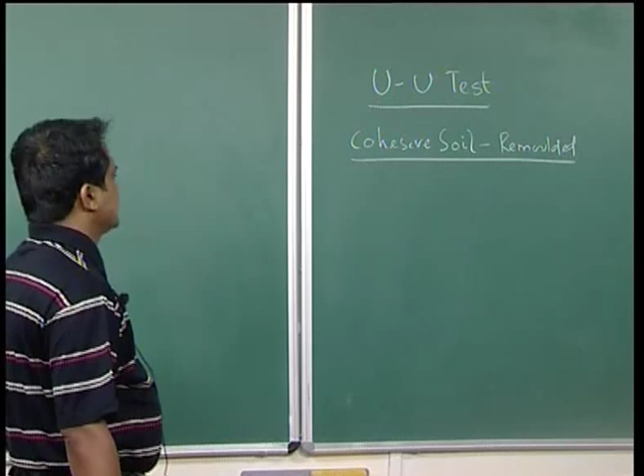Now, we will start this triaxial test on cohesive soils: UU, CU and CD test. We will explain it step by step, starting with the UU test for cohesive soil, remolded or compacted.

Now, take a soil sample.

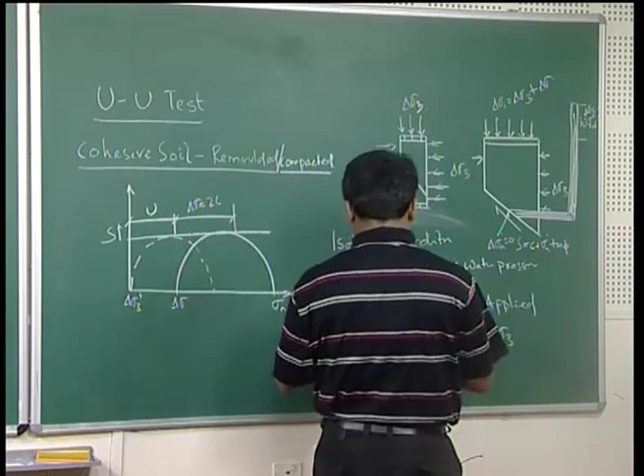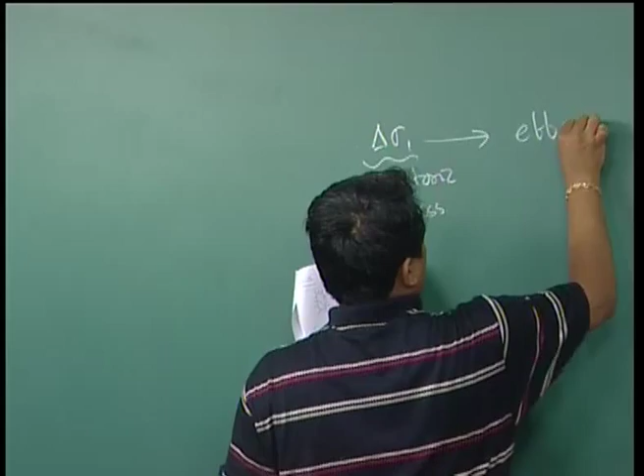That means with no drainage, U is equal to delta sigma 3 confining pressure. That means delta sigma 1 is your deviatoric stress, which will be effective stress on plane AA, and delta sigma n prime is equal to delta sigma n minus u, which is equal to 0.

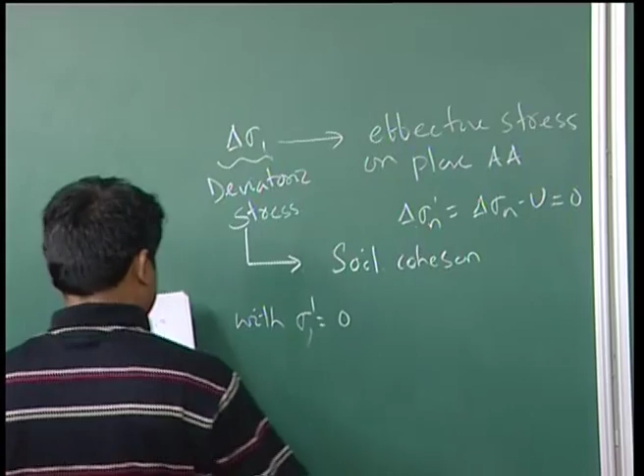This will be carried by soil cohesion. So, with sigma prime effective stress equal to 0, that means friction in terms of total stress is 0. That means S is equal to C.

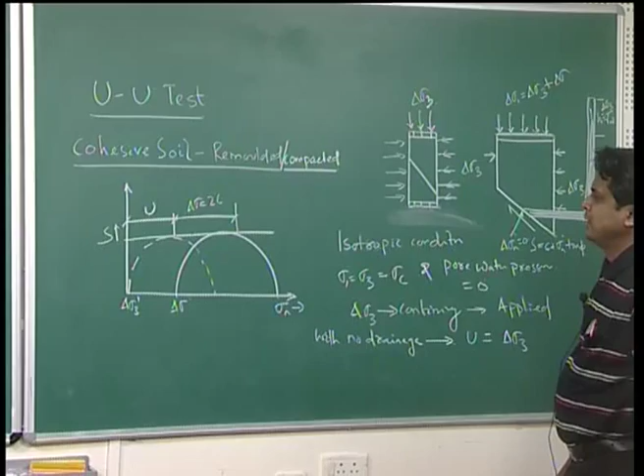Now, if you look at this, this is my UU test; earlier we finished for cohesionless soil. In triaxial test, UU test is unconsolidated, undrained, meaning drainage path is closed. If you look here, this is my typical soil sample. Initially, confining pressure has been applied, all round confining pressure, let us say delta sigma 3.

In isotropic condition, what is isotropic conditions? That means sigma 1 is equal to sigma 3, which is equal to sigma c. In isotropic conditions, pore water pressure is equal to 0. So, delta sigma 3 is your confining pressure, it is applied.

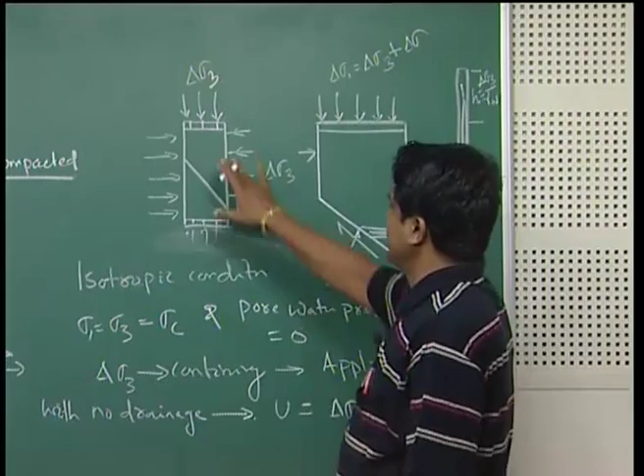How is the shear strength, meaning the triaxial test, conducted? Initially, the soil sample is put in the triaxial mold. Inside that triaxial cell, the pressure delta sigma 3, all round confining pressure, is applied. Once the all round confining pressure has been applied, with this pressure consolidation may be done with isotropic conditions, or without isotropic conditions.

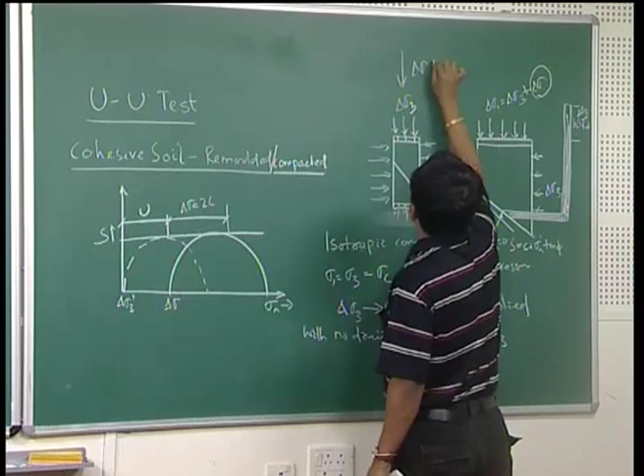So, I have taken the failure envelope of the soil sample in these directions. Once after the consolidation, meaning there is no further consolidation, you apply for shearing, meaning delta sigma 1 is your deviatoric stress, that is delta sigma 3 plus delta sigma. This is my stress applied in vertical. If this is my total sigma 3 or delta sigma 3, this plus delta sigma will be my delta sigma 1.

Now, what will happen? Delta sigma 3 is your confining pressure applied; as it is unconsolidated, undrained, there is no drainage. What will happen? U is equal to delta sigma 3, whatever the pore water pressure, it will be because of your applied confining pressure. The moment you apply your deviatoric stress delta sigma 1, that is your effective stress on plane AA.

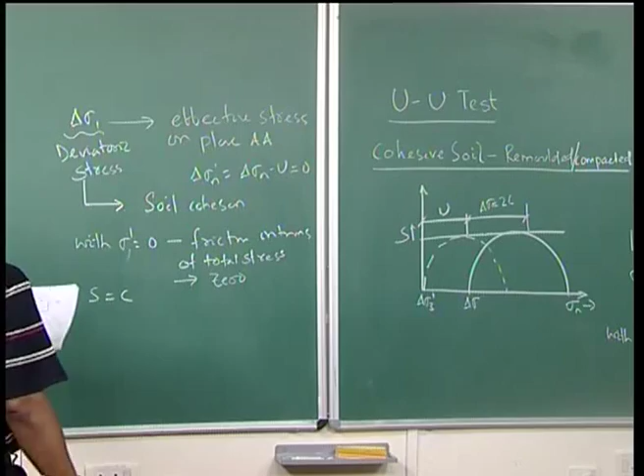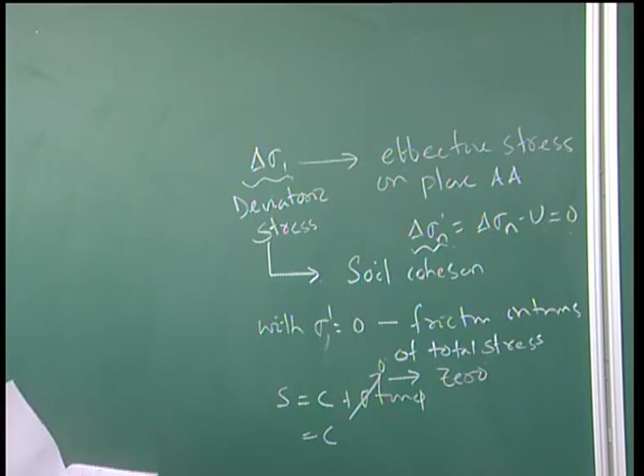Delta sigma prime, effective stress, is equal to delta sigma n minus u, which is equal to 0. So what happens with this term? Friction in terms of total stress is equal to 0. That means S is equal to C plus sigma tan phi. So this term will be 0, then S is equal to C, meaning your shear strength will come in terms of C. Now, the diameter of the Mohr circle is unchanged by pore pressure, but the origin of the circle is shifted to the left by pore pressure U.

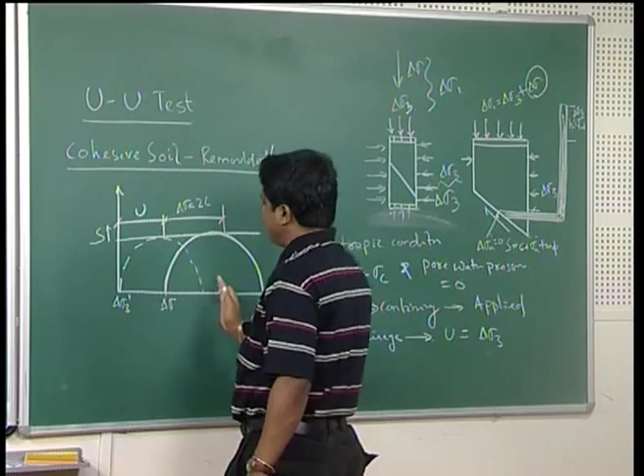If you look at here, it is unchanged, but this origin has been shifted from here to here in terms of U, the pore water pressure.

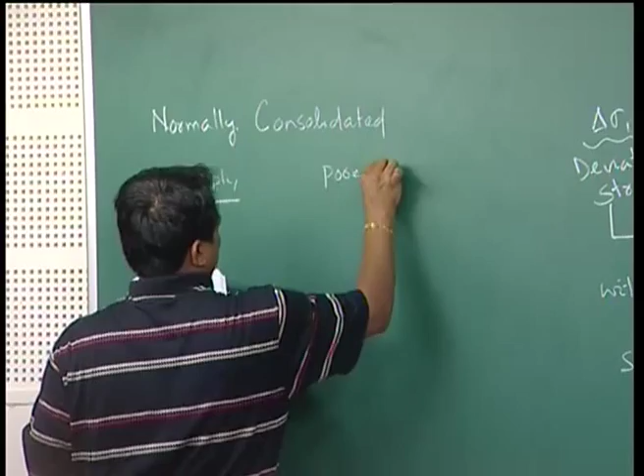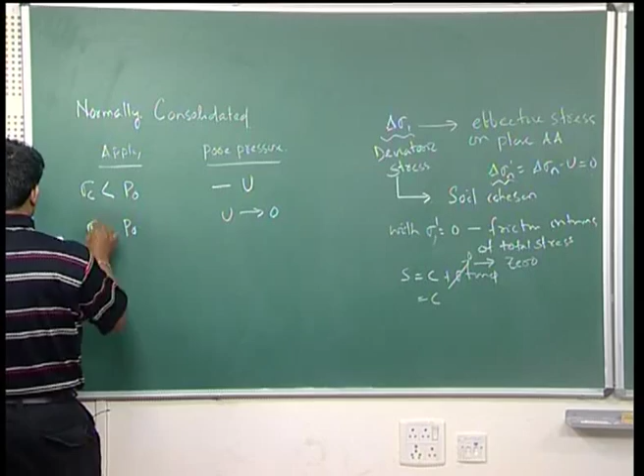Now, for normally consolidated soil, what will happen if sigma c is less than P0? That means it will be negative pore water pressure. If sigma c is equal to P0, U tends to 0. If sigma c, the consolidation pressure, is greater than overburden pressure P0, then positive pore water pressure is developed. Negative pore water pressure will develop when sigma c is less than P0.

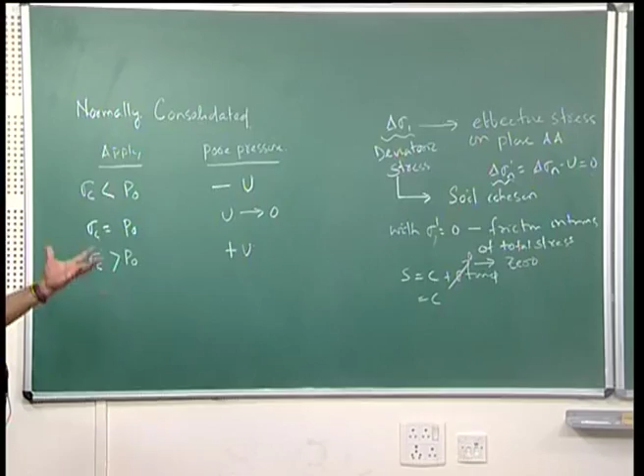That means when the consolidation pressure is less than P0, it will try to take the water inside, so negative pore water pressure will be generated. When sigma c is greater than P0, positive pore water pressure builds up inside the soil, so positive pore water pressure will be developed. When sigma c is equal to P0, pore water pressure tends to 0.

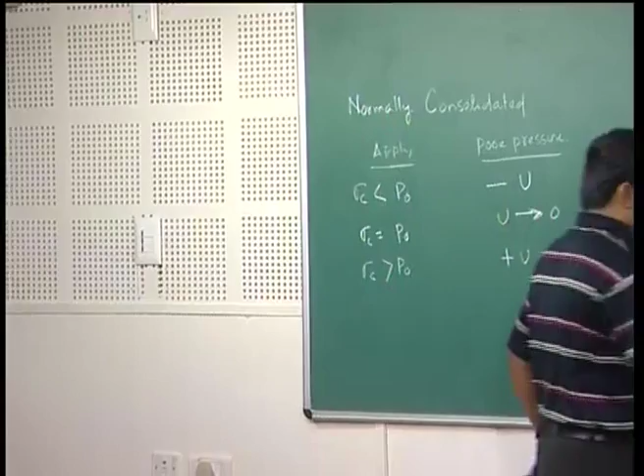Now, next part is your consolidated undrained test, CU, that is your CU test.

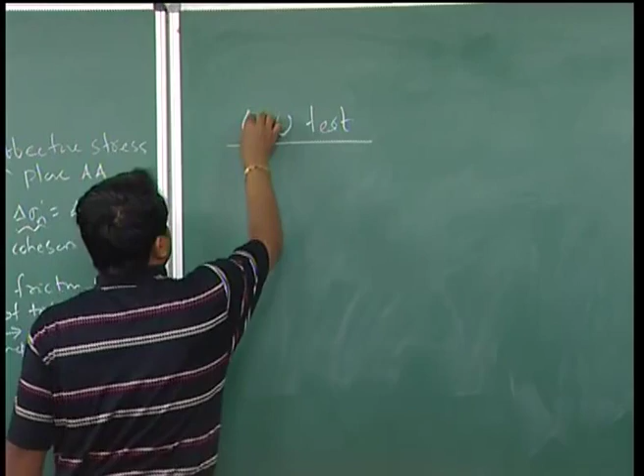CU test means consolidated undrained test. That means consolidation will be there, and during shearing, this drainage valve will be closed. So after consolidation, shearing will be done in undrained conditions. Now, if I draw the diagram in two conditions, one is isotropic conditions, other is anisotropic condition.

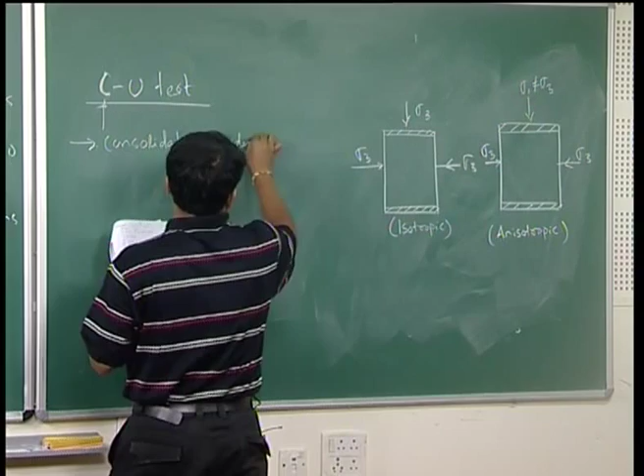In isotropic conditions, that means consolidation under cell pressure sigma c, under cell pressure sigma c, it is not stress as in situ.

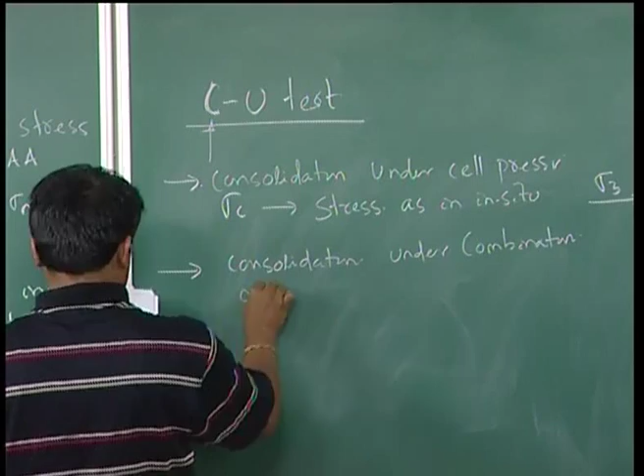Now second is your consolidation under combination of cell pressure, that means sigma c, that is your cell pressure plus additional vertical pressure. Additional vertical pressure: sigma 1 is equal to sigma c plus delta sigma 1. This is your additional vertical pressure.

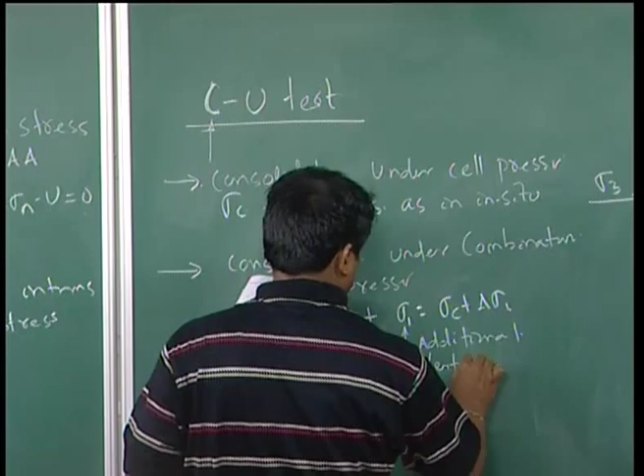This is your anisotropic condition, and this is truly in situ condition.

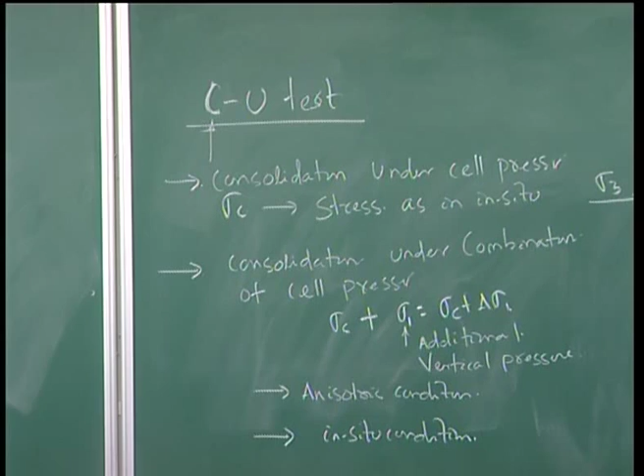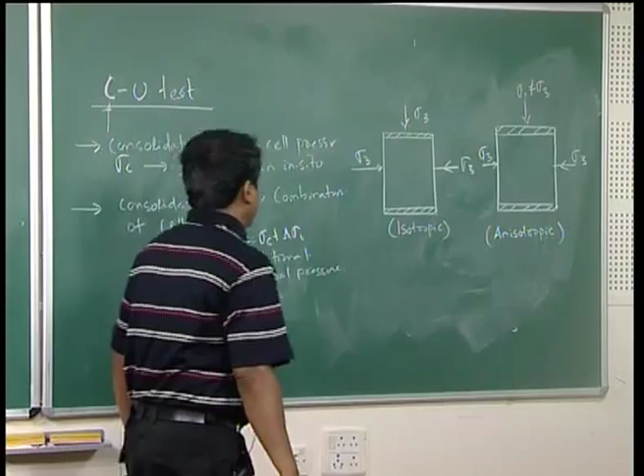Look at these two conditions. CU test is your consolidated undrained, that means the soil sample has first been allowed to consolidate, then after consolidation is over, shearing will be done in undrained conditions. I have made two conditions, one is isotropic, another is anisotropic.

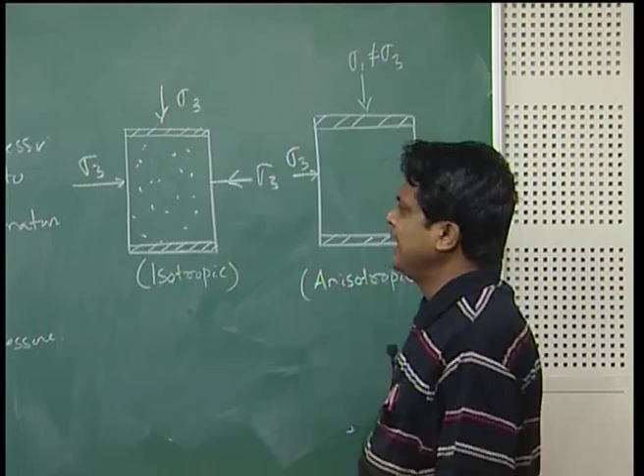In general, what happens in the laboratory: the consolidation is done by means of all round confining pressure or cell pressure sigma 3. Initially the soil sample is there, you go for saturation, once saturation has been achieved with your B parameter checked, then you go for consolidation. The consolidation is done with only the cell pressure applied. Once you open your drainage valve, or by measuring the change in water level, that is also a standard way you can find out consolidation under the cell pressure.

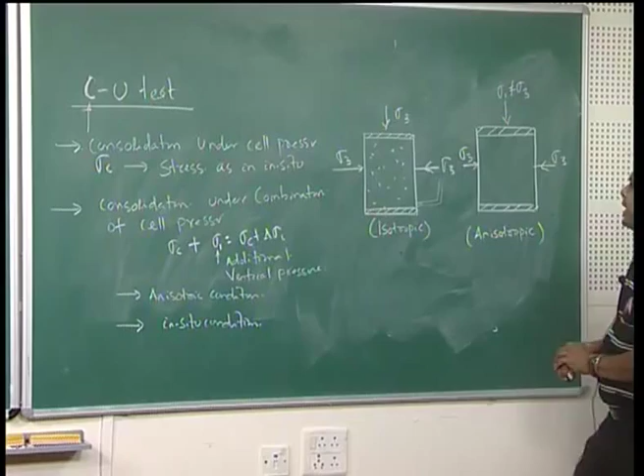In this condition, particularly consolidation under cell pressure, because the cell pressure acts around sigma 1 and sigma 3 - since this is cylindrical shape, sigma 1 and sigma 3 are the same - that condition is called isotropic.

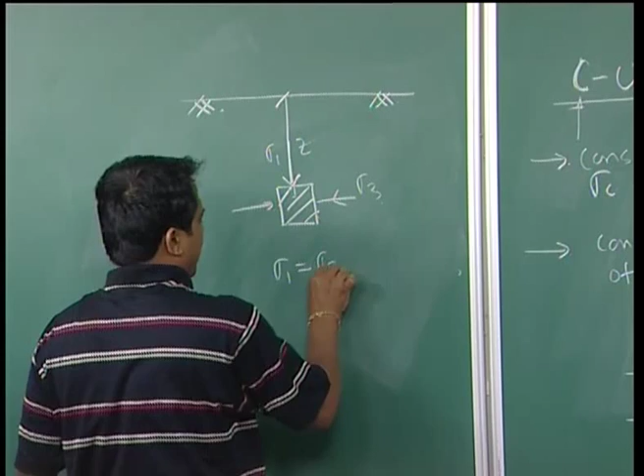But what will happen, it is not truly reflecting the soil sample. Suppose this is my field condition: suppose the soil sample is collected at a distance or at a height z from the ground surface. Once the soil sample is there, it has both vertical as well as lateral pressure, this is your sigma 1, sigma 3. It is not always that sigma 1 will be equal to sigma 3, or which is also equal to sigma 2. If stresses are same in all round directions, that condition is called isotropic, but this is not true in field conditions.

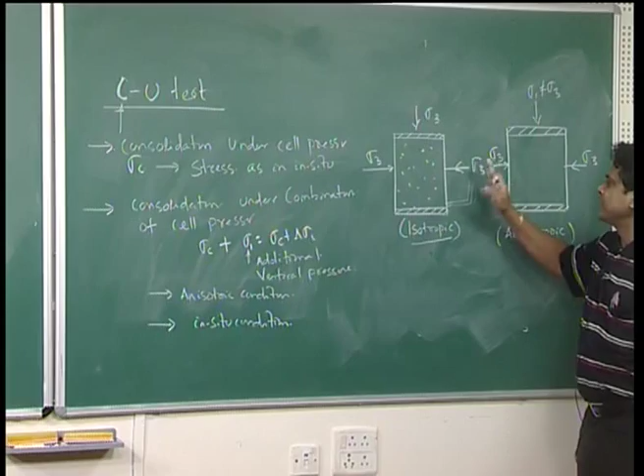That means to simulate the field conditions in the laboratory, consolidation under combination of cell pressure is used. First you apply your confining pressure or cell pressure, let us say sigma 3 is equal to 1 kg per centimeter square. Apply the confining pressure all round. I will show you a video after this test, about this equipment - I will show some photographs or video.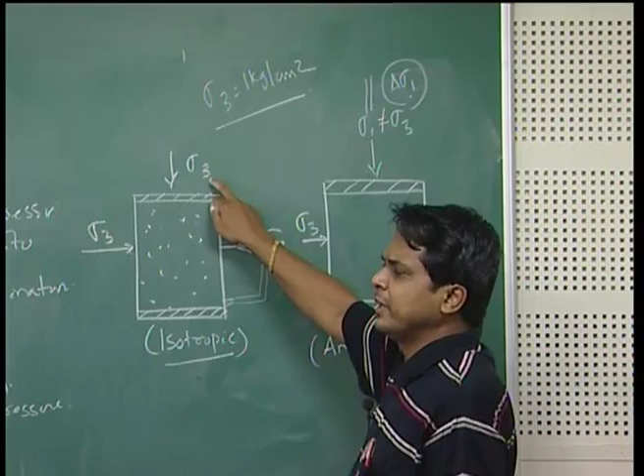So confining pressure sigma 3 of 1 kg per cm square has been applied. Then once that has been applied, you apply additional vertical pressure, that is your sigma 1, which is equal to delta sigma 1, additional vertical pressure you apply. So the all-round confining pressure is sigma 3, but now sigma 1 is no longer equal to sigma 3 as in the isotropic case.

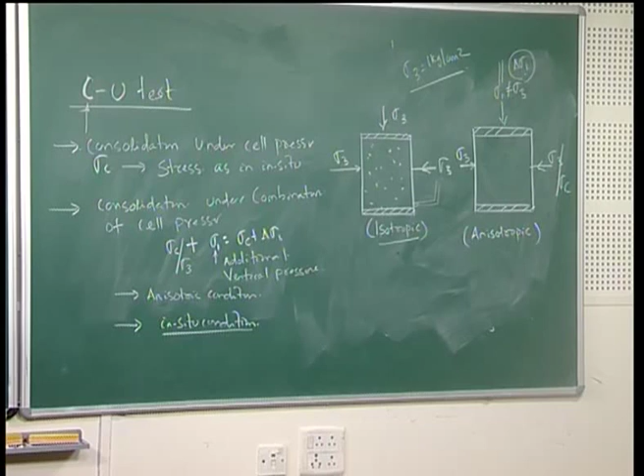In that case, because of the additional vertical pressure applied, sigma 1 is equal to sigma 3 or sigma c plus delta sigma 1, that additional vertical stress applied. So sigma c, or sigma 3 plus delta sigma 1, represents your anisotropic conditions, and that will truly represent your in situ conditions.

In general, in consolidated undrained test, there are two types: isotropic conditions and anisotropic conditions. Generally in the laboratory, isotropic conditions are applied for consolidation. In that case, all round confining pressure sigma 3 is maintained constant, and with this all round confining pressure, consolidation is achieved.

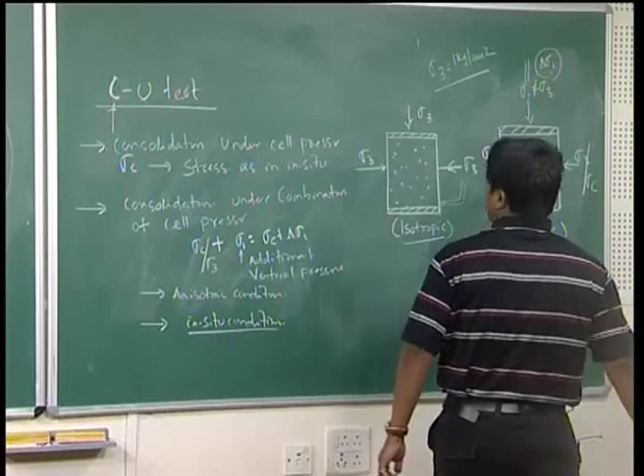But in anisotropic cases, an additional pressure after the all round confining pressure sigma 3 is applied, that is sigma c plus delta sigma 1. So sigma 1 will become sigma 3 plus delta sigma 1. This will be your anisotropic condition, meaning stresses in the x and y directions are different.

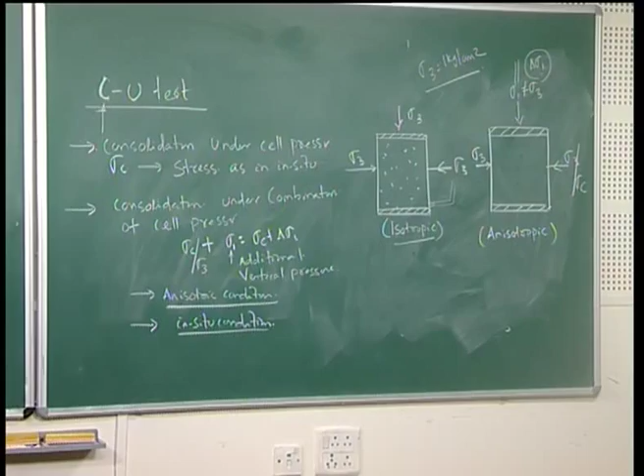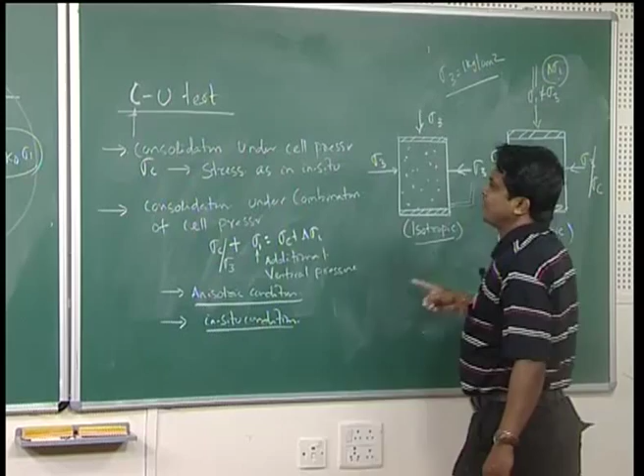This truly represents in situ conditions. If I take a soil sample below the ground surface, sigma 1 is not necessarily equal to sigma 3, because sigma 3 is always equal to k0 times sigma 1. So sigma 1 will definitely be different than sigma 3. To achieve these conditions, anisotropic consolidation should be applied in the laboratory before starting the undrained shearing.

Now let us draw the basic diagram of void ratio versus log P.

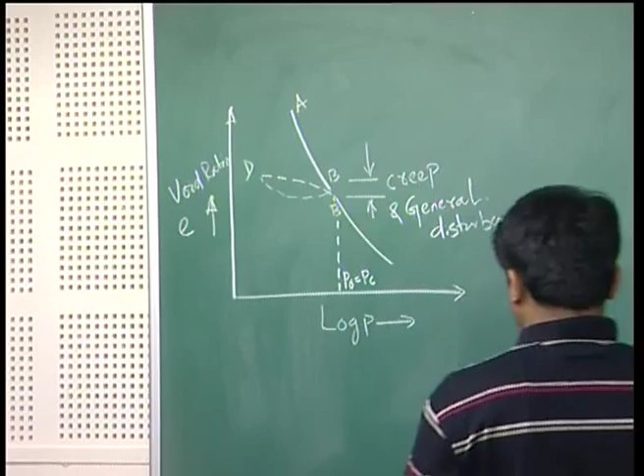There are two graphs I am drawing: one is E versus log P, the other is delta sigma 1 versus strain, you can say stress versus strain.

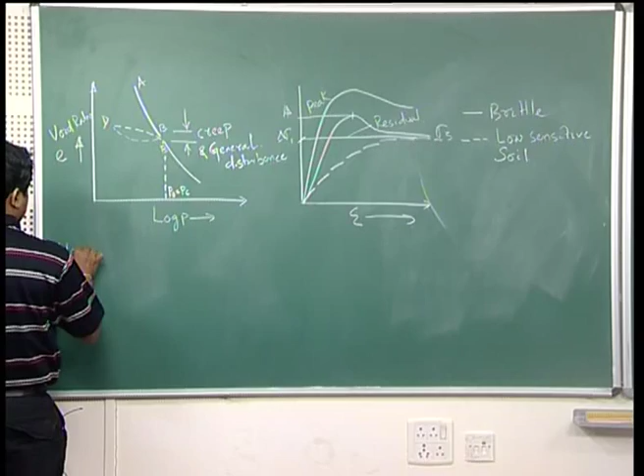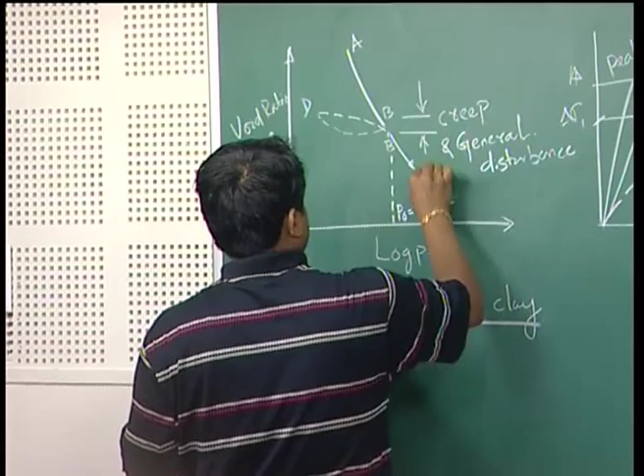Under normal field conditions, soil consolidates along path A, B, C. So the present status of the sample, if I take a soil sample in the field, as it is normally consolidated clay, means this consolidation process is still underway.

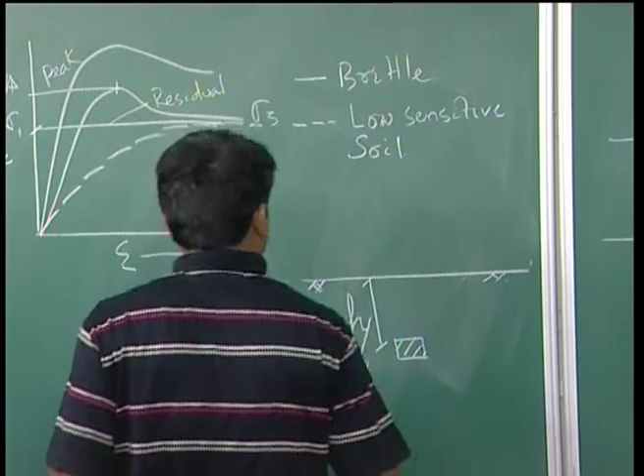At a depth h or z, once I take the soil sample, point B represents the present status of the sample. At a distance h, the soil sample is there, so the status of the soil sample represents point B.

Corresponding to one overburden pressure P0, from this B status, when the sample is removed from the ground surface, as it is a normally consolidated soil, the present state of the sample is at point B.

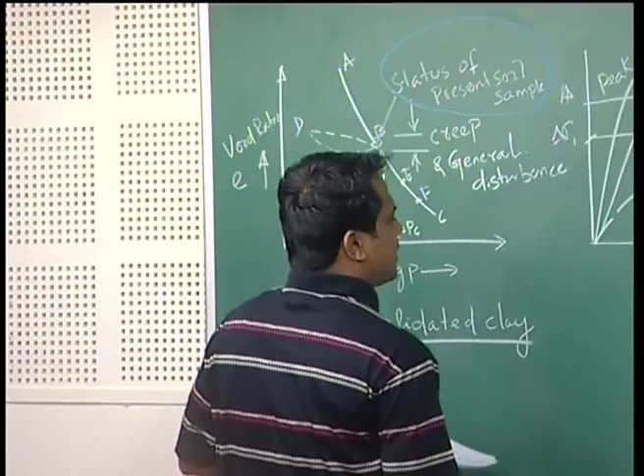The moment the sample is taken out from the field, it loses its overburden pressure. Without overburden pressure, the sample will try to expand, and this expansion is represented by line BD. Pressure is lost and hydrostatic pressure conditions are changed, so line BD represents sample expansion due to loss of confining.

This is sample expansion due to loss of overburden.

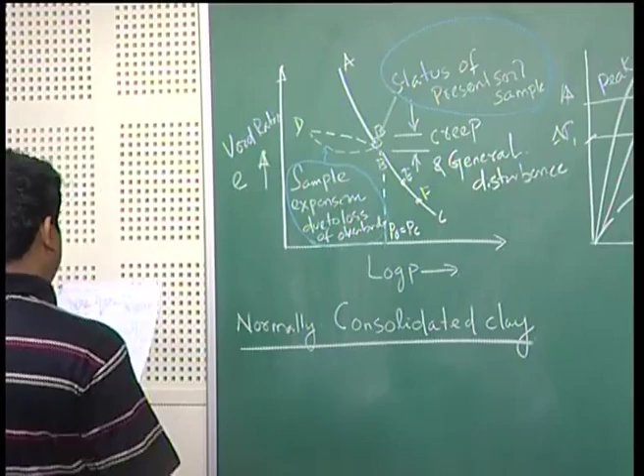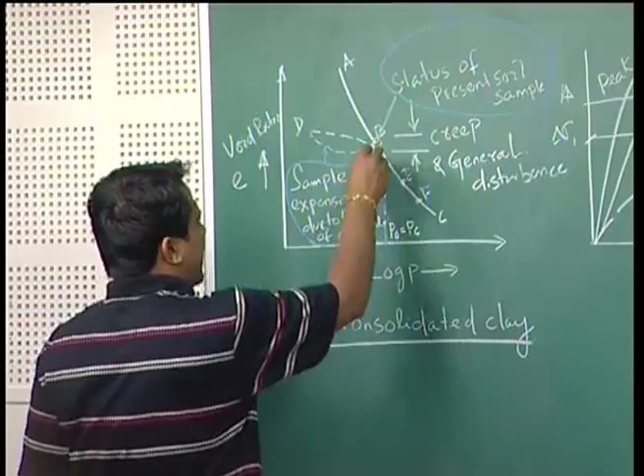Then from D to B prime, what happens after the sample is placed in the triaxial apparatus? At this point, this was the field condition. BD represents the sample taken from the field, with expansion occurring due to loss of overburden. B represents the status of the soil sample in the field.

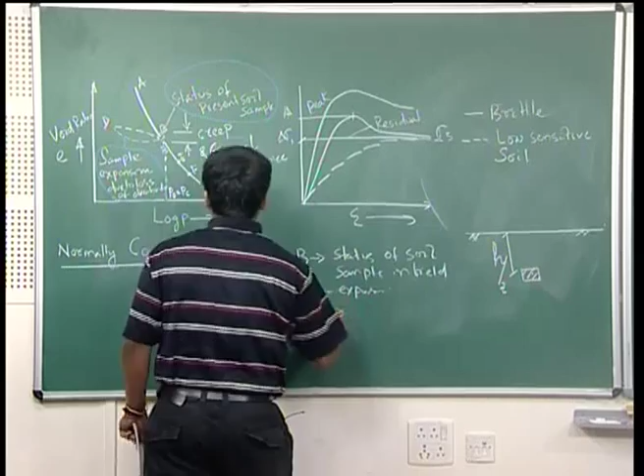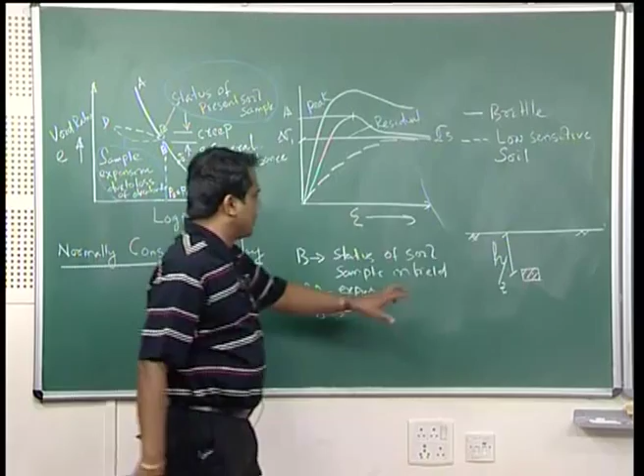BD is the expansion due to loss of overburden, then D to B prime occurs the moment you put it inside the triaxial cell, because of confining pressure recompression will start, this is D to B prime. So in bringing this sample from the field to the laboratory triaxial test, it will go from B to B prime to regain its original position.

If I have taken B to B prime here, what will happen? B prime is nothing but your degree of disturbance.

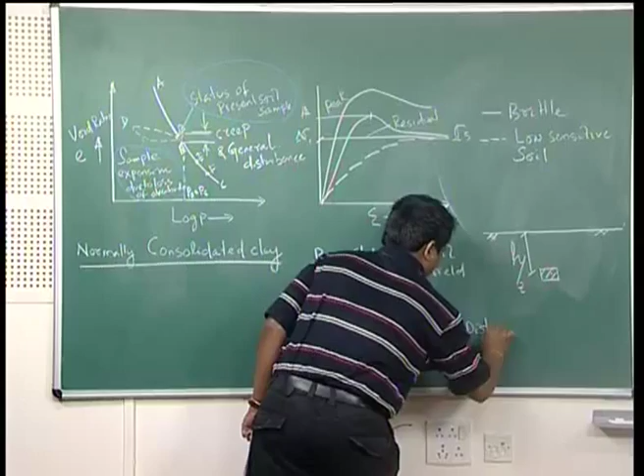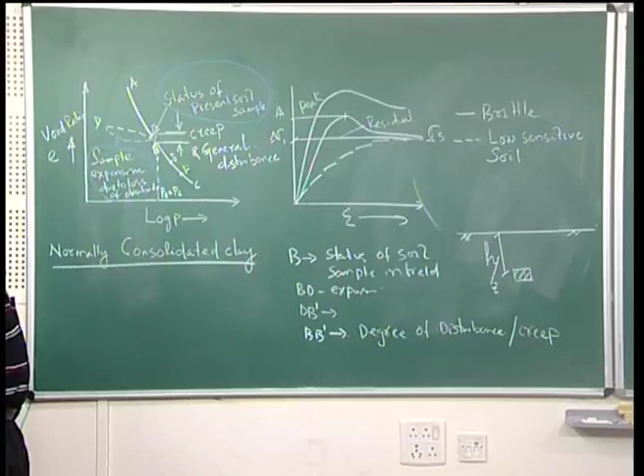Degree of disturbance, or it may be because of your creep. Now, look at this once again, this explanation is there. ABC is your normal consolidation graph for normally consolidated soil. Normally consolidated clay means the consolidation is going on. Let us say B is your point which represents the status of the present soil sample.

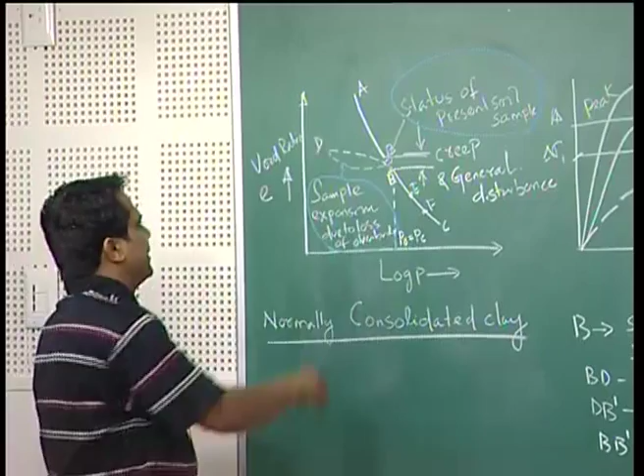Then, the moment you take the soil sample from the field to the laboratory, it will lose the overburden. Then the sample tries to expand because of the loss of overburden, that is B to D. Then the moment you put the soil sample inside the triaxial, because of confining pressure sigma c, it will recompress from D to B prime.

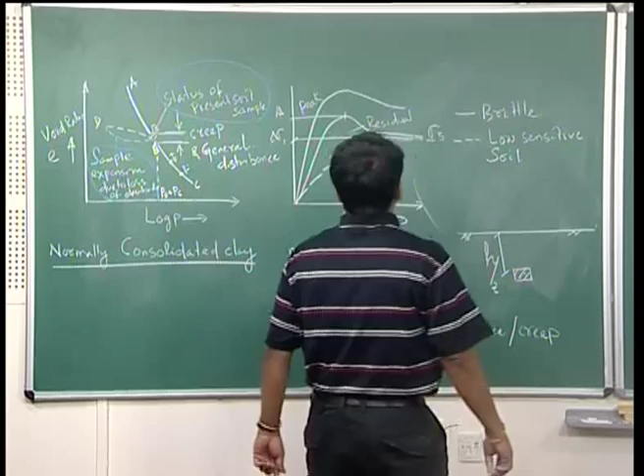This particular B to B prime is your general disturbance of the sample from field to laboratory, and it represents your creep. Now, these are stress versus strain curves. One I have drawn for brittle, the other for low sensitive soil. After the peak, the residual part will merge with your low sensitive soils, or you will get a residual, meaning strength remains after your peak.

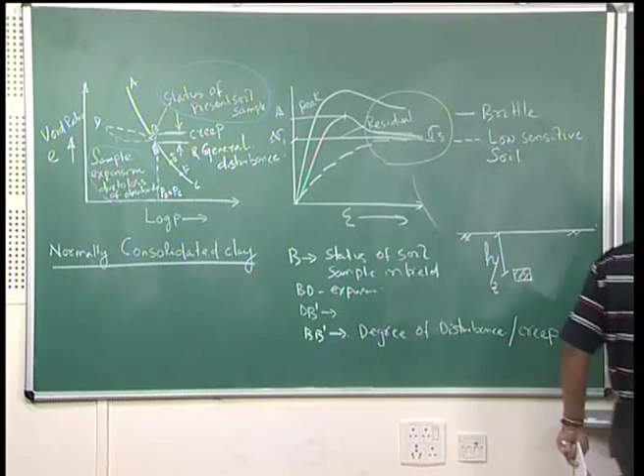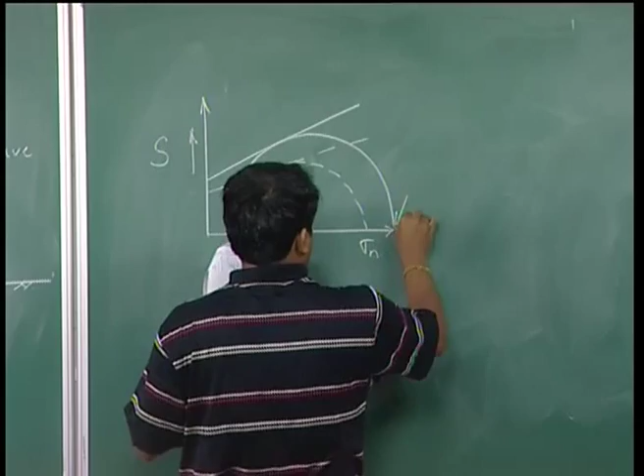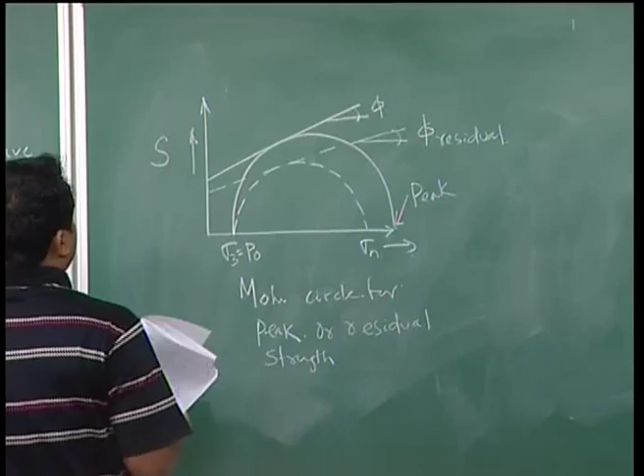Now, this graph represents your sample disturbance. Now, come back to the CU test in terms of residual and peak. If I draw it, Mohr circle for residual and peak, if you look at this diagram, what will happen in stress versus strain in the consolidated undrained test, CU test.

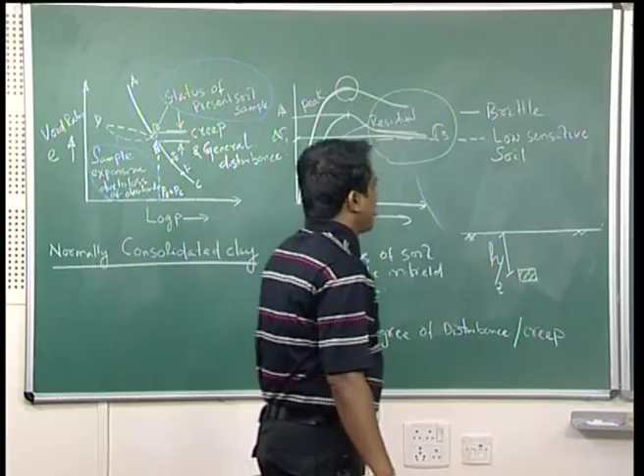So, it will reach a peak, and that peak we have considered as the failure, peak failure. So, sigma 3 is nothing but your P 0, it will start here, this is your confining pressure applied, here is your peak, that is your sigma 1, and this gives the Mohr circle in terms of peak failure. This represents phi, and this represents C.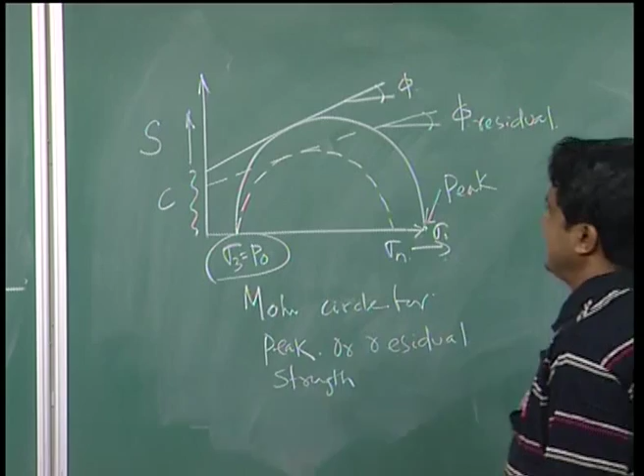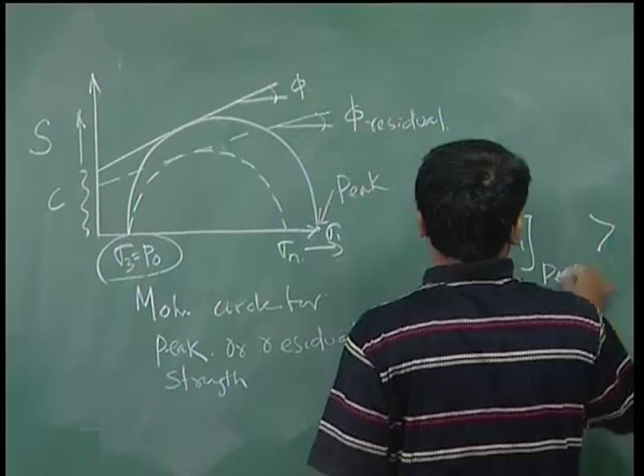Now, if I want to draw for residual strength, the same confining pressure is there, but the residual strength will be somewhere else, the peak will be somewhere else, say delta sigma 1. If you compare both, delta sigma 1 for peak is greater than delta sigma 1 residual.

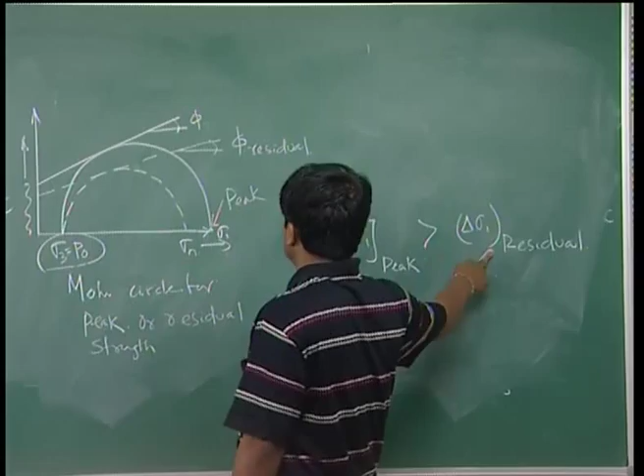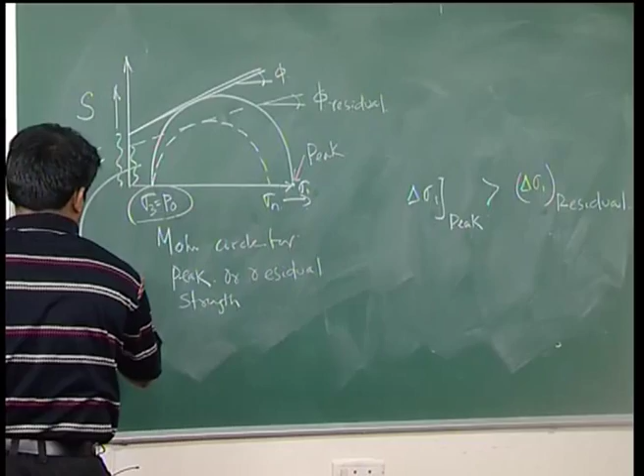So, the moment you draw in terms of residual, delta sigma 1 will shift slightly away from your peak, but sigma 3 is constant. So, the shear parameter envelope will become slightly flatter. This is your C residual and this is your phi residual. Because of the peak, the C value will be high and phi value will be high, and otherwise it will be phi residual and C residual.

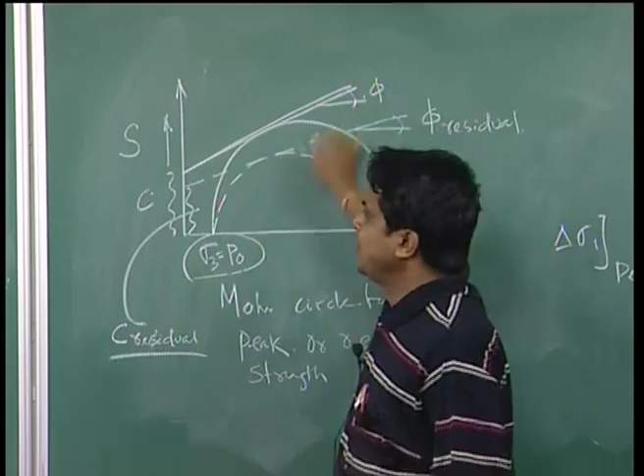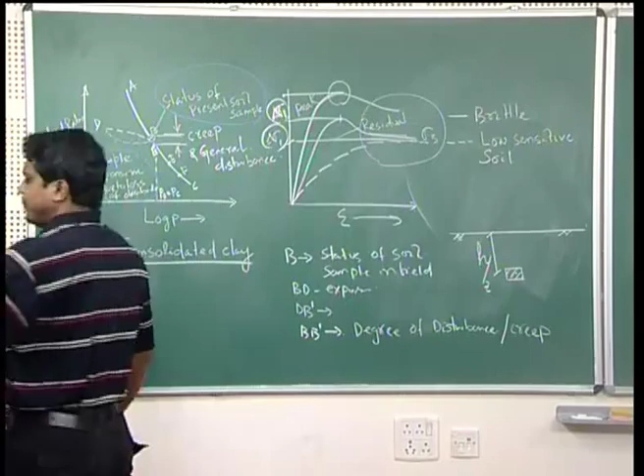So, while designing, which parameters you need from the consolidated undrained test, CU test: if you want peak, you can use this C and phi for peak in design. If you want phi residual and C residual, you can take the residual values for your design. So, this is a brief discussion of the consolidated undrained test, how it represents field conditions, and whether you want residual or peak. Next is the consolidated drained test.